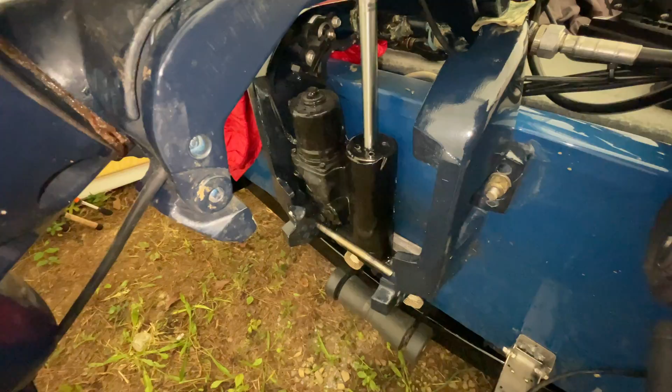All right guys, I've already got this broke loose. I didn't film me breaking it loose because I was kind of worried it wouldn't come loose. That's kind of what I want to talk about real quick: I had FedEx overnight me a part from Marine Tech.

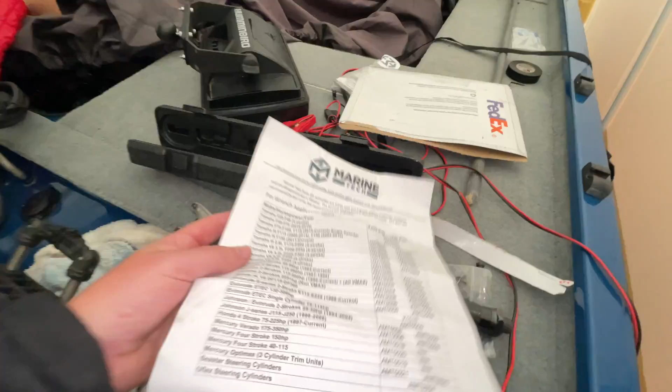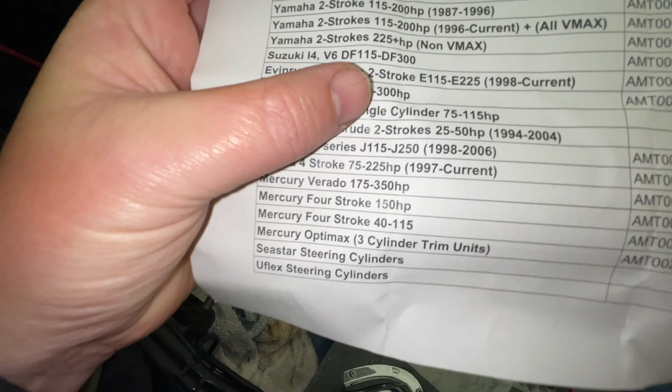They did not, I paid for this part. It cost me close to $80 having it overnighted. But for my particular model here, the Evinrude E-Tech single cylinder 75-115 K1010, is what mine was. So I actually went through Marine Tech, man. These guys are awesome, and got this tool right here, and it saved the day.

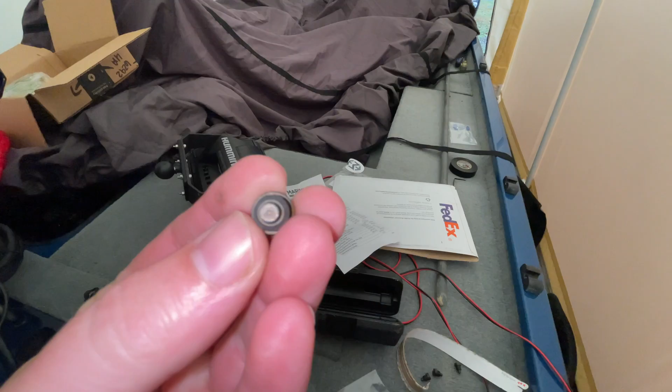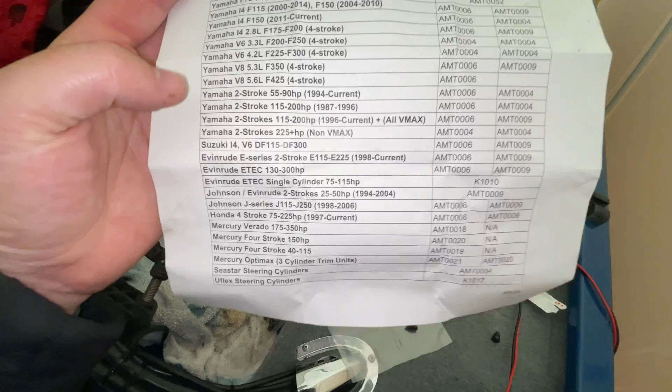What was really great is, I don't know if they normally do this or if you order it from somewhere else, but it came with these tiny little pins wrapped with this in the package. See, I got another one of these I ordered off Amazon from Marine Tech itself, but I didn't really pay enough attention that there's different sizes. I got the 35 millimeter and thought it would fit, but this one's kind of an awkward size. That's why it really doesn't fit anything else other than these E-Techs.

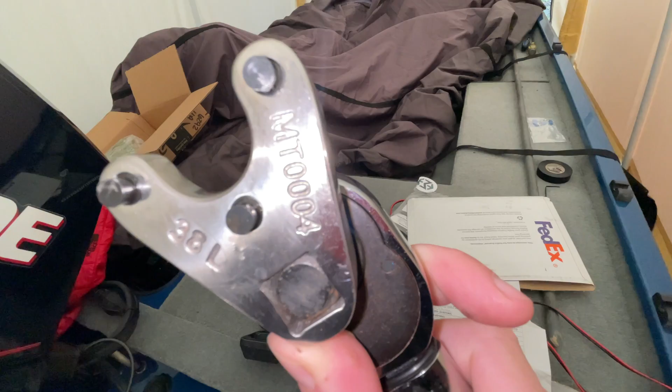This K1010, it's a 38 millimeter. You can see it, 38L MT0004. And that made a world of difference.

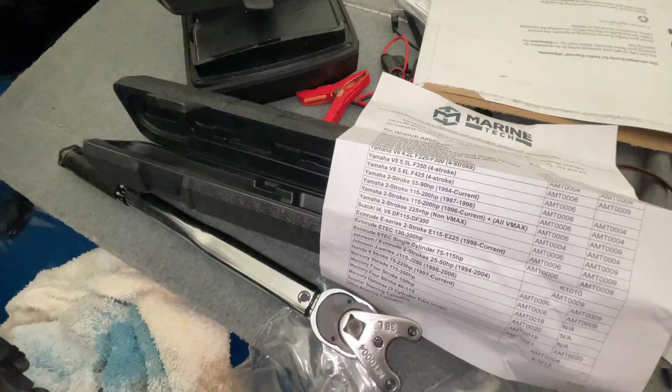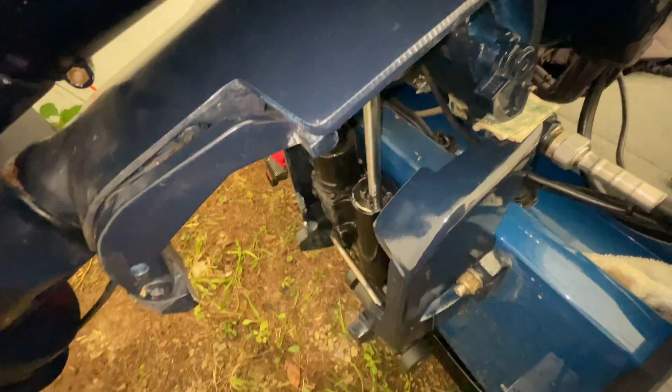Before that, after I ordered that other part and it wasn't right, I got a spanner wrench, which is over there somewhere, and that's how I ended up stripping this, because it wasn't holding properly, and it was just $15, stupid. I thought I was going to end up hitting my shaft there, so I bailed on that real quick and ordered this part here.

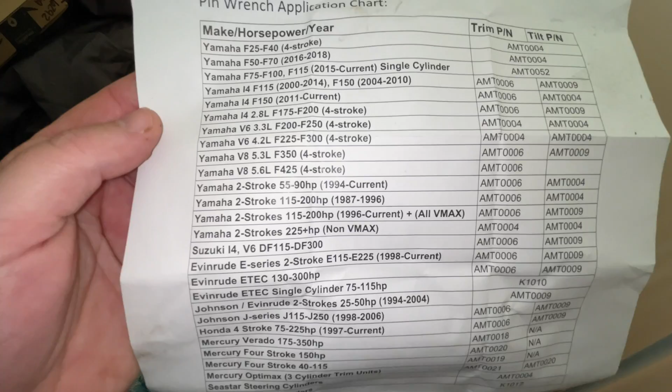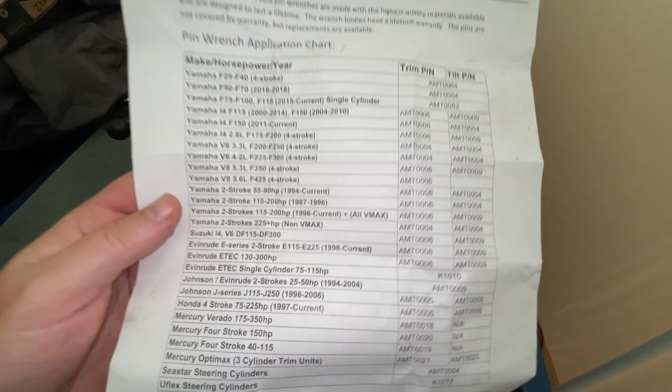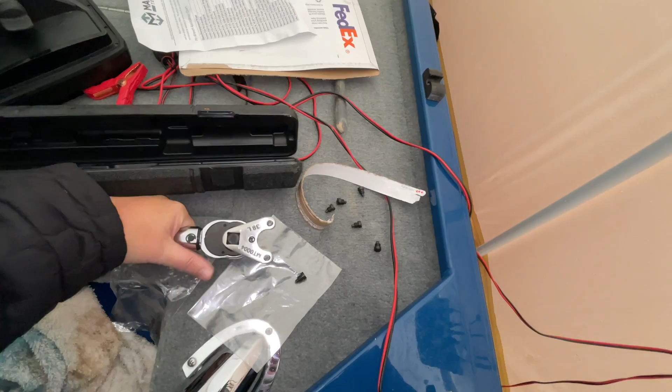Order these things. It's nice because you get 3 points of connection, and there's certain applications with other ones where you can get 4 points of connection. And with this big breaker bar -- well, it's really a torque wrench, but it makes a great breaker bar because it's not a very good torque wrench, but whatever -- it popped it off really well. It did it just like that. I was able to pop it off.

But let's get this off, I got some more stuff I got to do. So let's just get at it, guys. I just wanted to talk about that for a minute because I'm very happy that this actually works, and it worked well. It didn't take me long. I wasn't worried about it stripping or bending. So, all right guys, let's get at it.

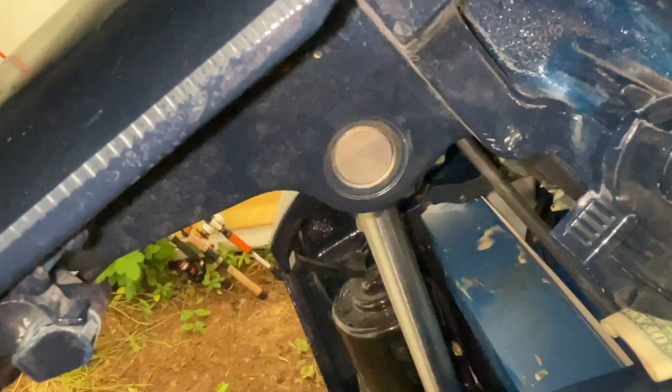All right guys, we flipped over here to... I've done pulled these pins. Once you pull these pins out, use... grab this side. I've got so much stuff laying over here. I had to go at this thing several angles.

I think I put my pin thing inside there. I put the pins in here. It's a little clasp thing just like this. It doesn't take a second to just pull those pins out. And what I'm smacking this thing with, if I can find it, is -- I've done this already to kind of feel my pressure.

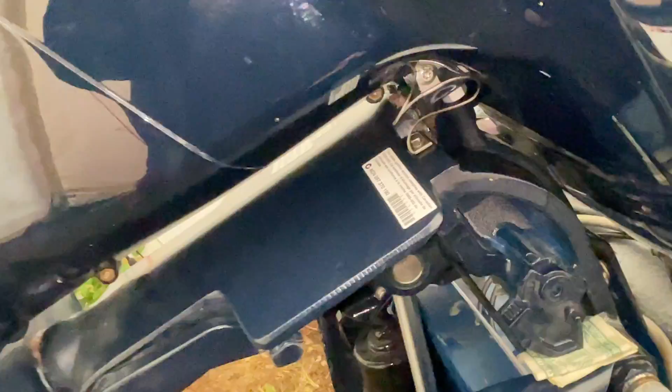All right guys, I flipped over. I've got a brass dowel here and a hammer. I'm going to push this pin on through. Won't take just a second. I'm gonna have to go get my tripod and my other camera, because this isn't ideal.

All right, first pin out. This is loosened up. Can y'all see anything? I can't see this, let's move this around here. These three points of connection here, you're able to just, and with this kind of wrench, makes it really easy. Put this in here, these holes.

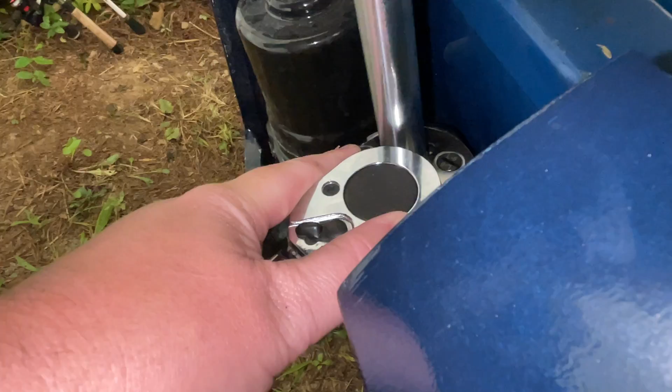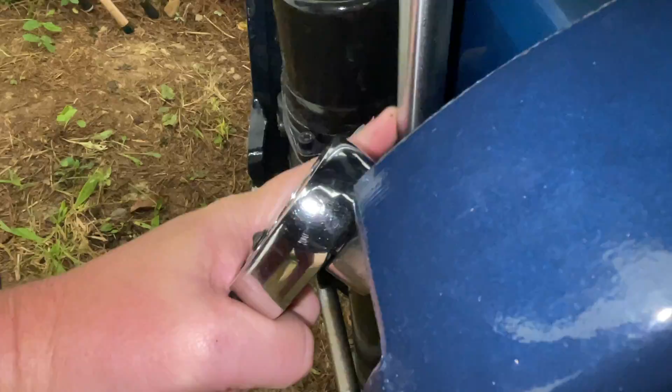And it just connects, and it will spin. See it spinning? Now, I should have wrapped this up, but it came out so easy and didn't pop up. I just put it on there to test it, and I was able to pop it right loose with this bar.

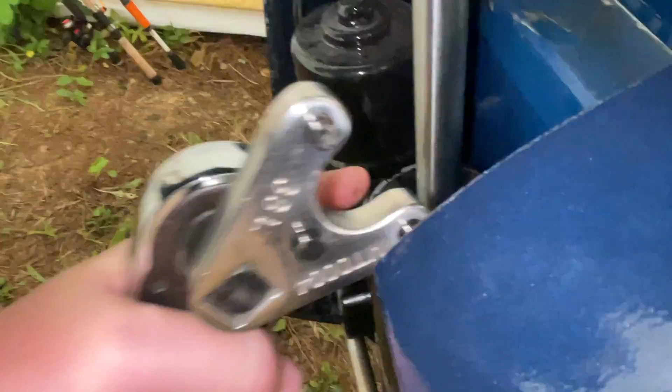All right guys, I'm gonna go ahead and get this head unscrewed. I gotta figure out how I'm gonna get this shaft out of that without touching this, real quick.

All right guys, boy, I look like a wild animal right now, I've been prying on it. Actually, it wasn't that bad, it wasn't that hard. The lighting is horrible in here. Even though this camera doesn't seem like it, I tried to set up my DSLR, and it just, you can't see up in here properly, so it doesn't work well.

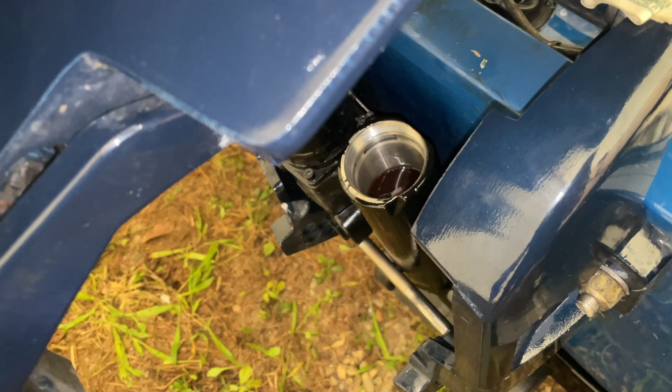So I'm gonna flip the camera around. I'm gonna talk about what we're doing and how I done it, and I'm gonna explain it the best I can to a T. All right, what we've done here, we have the shaft out. I wasn't able to film it, but I'm gonna explain it because I did it really easily, and I was able to leave the lower unit in here as I did it. So how I done this is I completed unscrewing the cap.

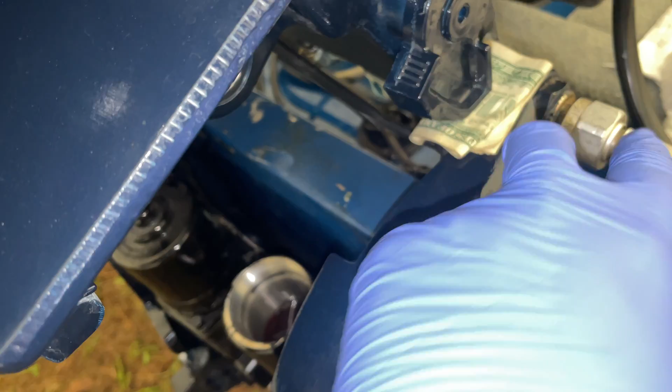Once I got the cap unscrewed to where it would just freely flow, this pin's already out. It's funny, I got a dollar bill, I didn't want to scratch the top of this. So that's my motor keeper. I just lifted on the lower unit here, lifted up, and it wasn't too hard. I mean, it's a few hundred pounds, but lifted it up, and I was just able to slide the shaft completely out of the cylinder.

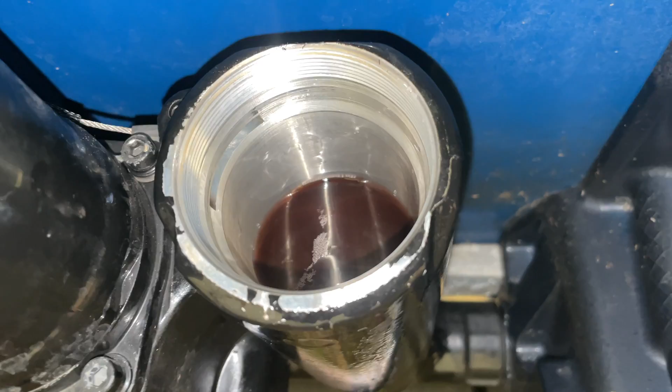There's still oil in there. Now this may be a little bit harder to get back in. We'll see, but that is out, and nothing has to be done down here, so this is fine. I need to get in here and make sure no debris is in my cylinder head. And if it looks like there's some old oil, it might be a good idea to get rid of that. But all right, we were able to get that out.

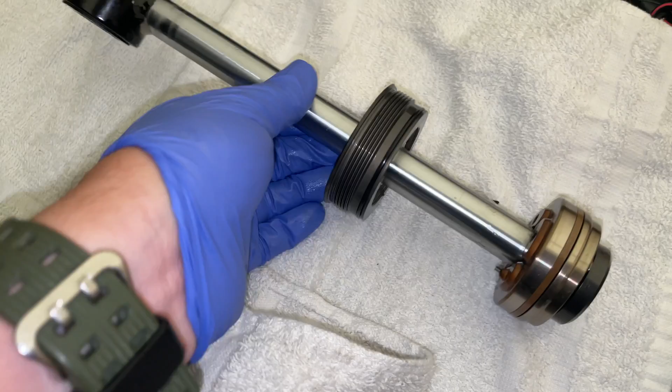All right guys, so we got that out. Here's the shaft, and this is for, a lot of my subscribers are going to watch this video at first, and other people may watch it down the road. If you have one of these Evinrude E-Tech early models, I have the paper in there, I forgot to bring it back out here. When you replace this end cap, it tells you specifically, you spend $170.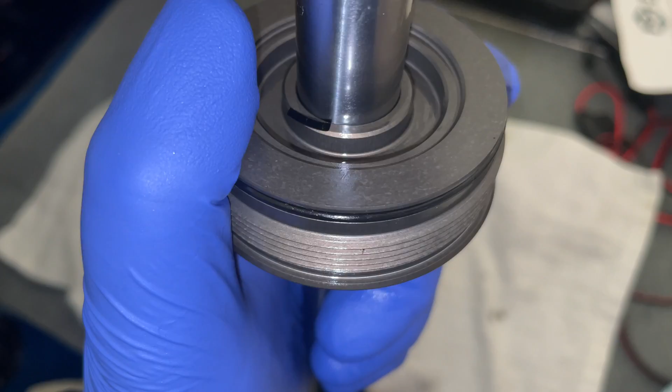You get O-rings and another cap, and it tells you this early model, that cap will not work due to the fact that it has this indention. The reason it has it is because the way the top of this is made, that little piece right there is able to fit in there perfectly. So unfortunately, with this model, in order to keep from damaging anything, you can't use the new end cap, which I'm pretty bummed out about. I have to use this scratched up old end cap, but whatever.

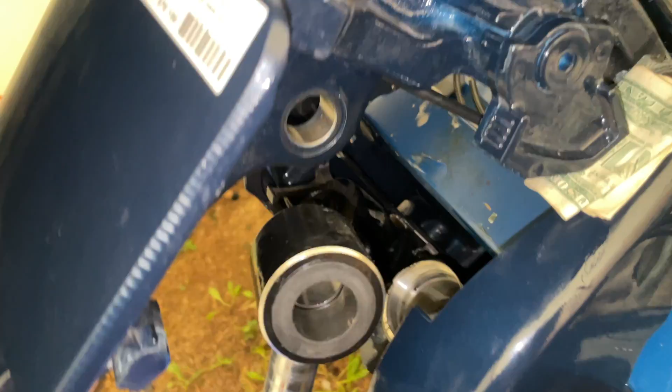So you have to reseal it. But before we can reseal it, we have to get this bottom piece off. Now, I've seen a lot of guys online, they'll take and put this thing in a vise. I'm not going to do that, I'm going to do it a little bit differently. What I'm going to do is put the shaft back in here, and I'm going to get underneath of it with a plate, and I'm going to either just break it loose, then take it back out and unscrew it all the way, or I'm going to do it all the way.

I'm probably just going to break it loose, and then I'm going to take it back out and get these bearings out so I can wash them. And that's what we're going to do next. So I'm going to put the unit back in here, let it hang down.

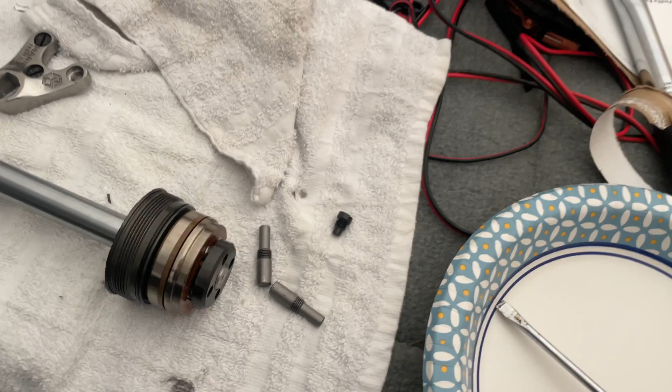All right, guys. Well, before I put it in there, I realized after I cut from that last clip, I don't have to lift the motor up because I can just move it into place because it's free. I don't know what I was thinking. But we ran into a greater problem. This is the one that I ordered that fits from Marine Tech. This takes off the top cap right here.

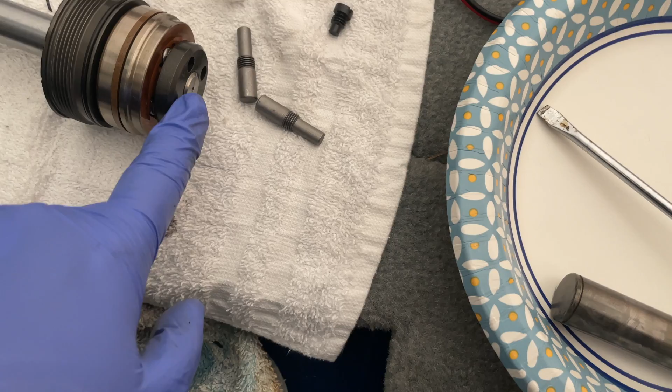Well, I didn't think about this being a different size. I don't know why it didn't cross my mind. But my spanner wrench is too big. The pieces that go in the spanner wrench are too big. So that won't work. So I got to thinking about that one part that I ordered that was too small, because that's how much smaller that one is than the one that I had to get for this. Whatever, it doesn't matter. But what I'm trying to state is God is good.

Because if I take that piece out and these two pieces, it actually fits perfect. I don't know if y'all can see that. I don't know if I can do it right. It fits perfect on there. So I have 2 points of connection on the side.

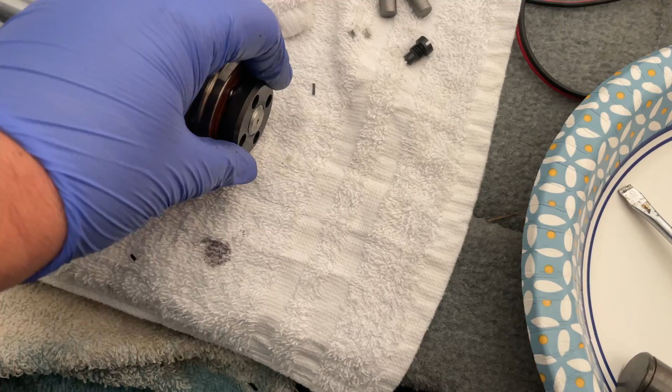So, hey, it's a mistake. It was like $60. I thought that was a big mistake, I would never use it, and there you go. God is good. I got a purpose for it. So it does work. So yay, I don't have to order nothing else and stop what I'm doing. So let's get this thing back in here, on here, get under here, and get to cranking and get this thing popped loose.

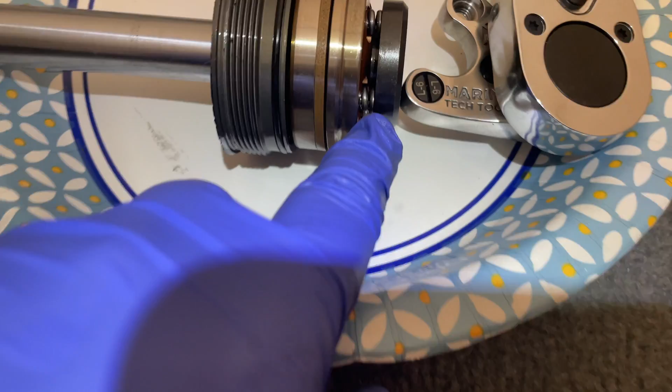All right, guys. So what I did was, I hate that I'm not filming this properly, but I'm still giving y'all the idea of how to do it. I put the pin back in there, held it down, I put the wrench on it, and I broke it loose. And as you can see, the springs and the little ball bearings are starting to come out.

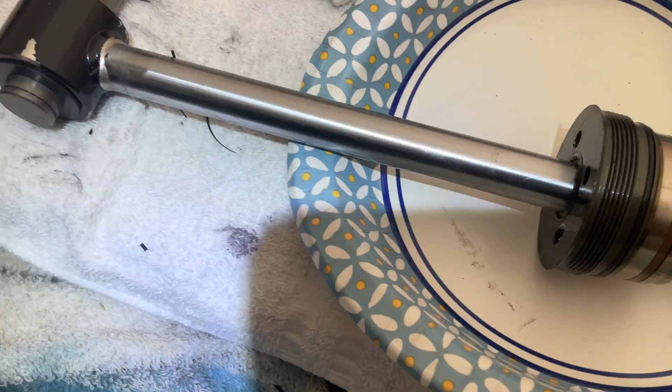And I broke it loose enough that I brought it up here, and I took the pin just to not stick any foreign objects and scratch anything. I stuck the pin in here and I'm holding it with my left hand, and I'm taking this with my rod and I'm turning it until these pop loose. And that's what I'm gonna keep doing, guys, until I get this off.

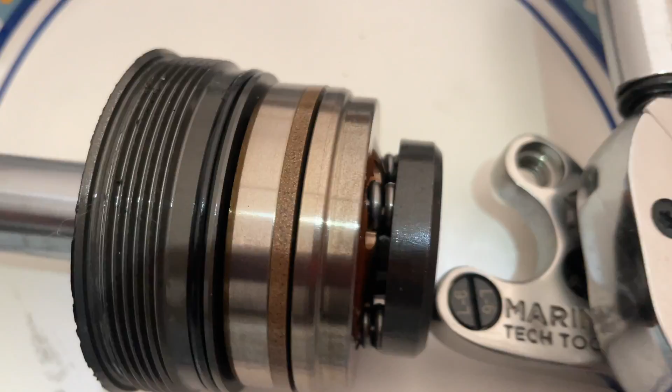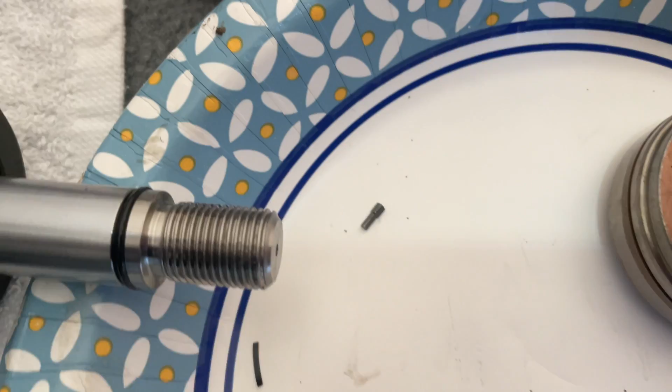Okay, guys, I got this off here. It was kind of a pain. I'm so happy that I messed up and ordered that extra part. If I wouldn't have got that, boy, this would have been rough. But the way I done it is this fits in over this. It goes over the O-ring. You just pop it out. This unscrews off like this, and I was able just to leave these springs in their original spots.

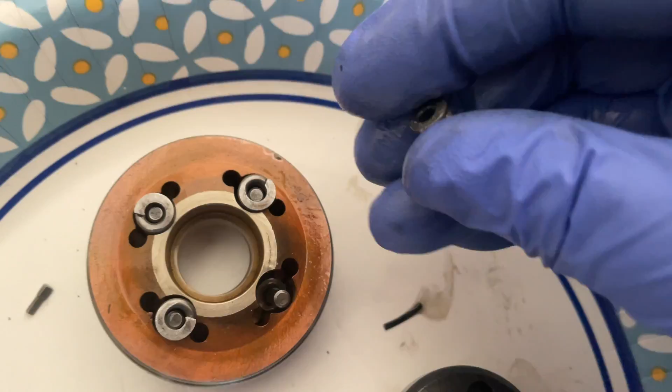I may clean them up and take them out anyway, but as you can see, the ball bearing fits. Well, hold up, guys. There's like a little pin that goes in there, and on the other side of that pin is the bearing. So if you mess up and they pop out, it's ball bearing on the bottom, pin, and then spring.

Then this piece. All right, guys, I'm gonna get this pulled off here, wipe it up, and then we're gonna go in the house and switch these O-rings out. And that's where we're headed next. All right, guys, here's the part, we got it off. But I want to show y'all here.

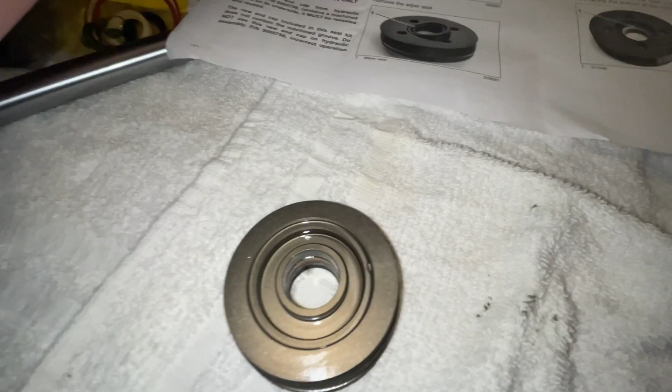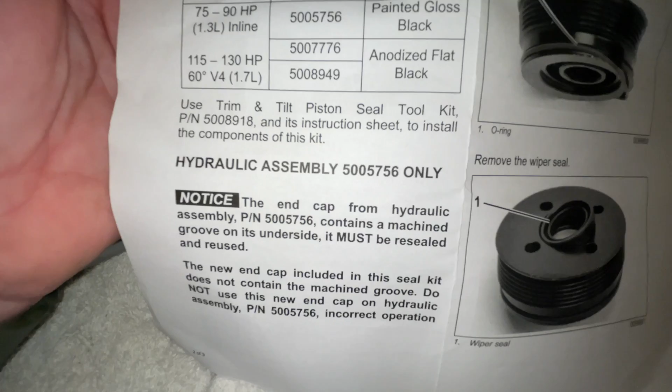It says, notice: the end cap from hydraulic assembly P/N 5005756 contains a machined groove on its underside. It must be resealed and reused. The new end cap included with the seal kit does not contain the machined groove. Do not use the new end cap.

And as you can see here, this is that one, that I'm not supposed to use a different one. I have to reuse this one, which is unfortunate because you can see the groove right there. And this new end cap that they send you, which I would really like to use, is smooth.

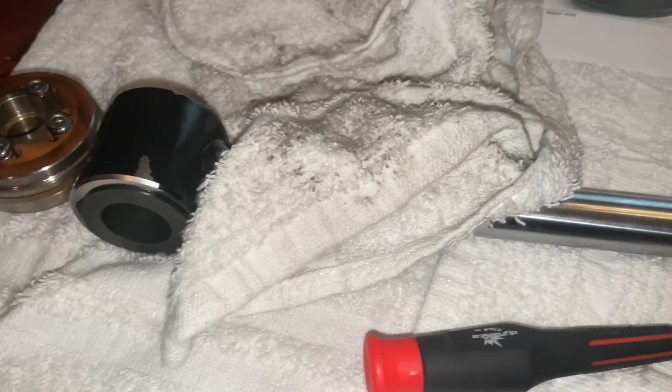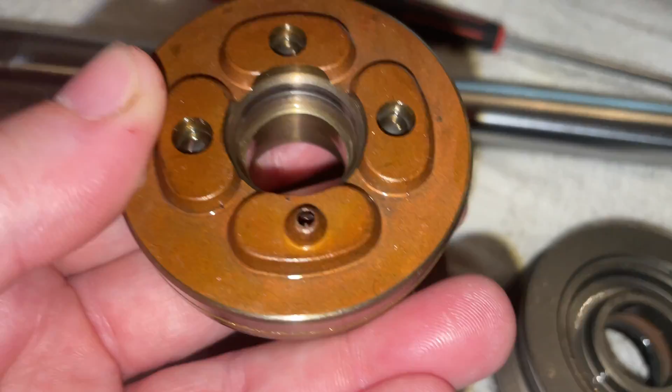All right, guys. Well, after sitting here thinking about this for a little bit, I watched some other videos on YouTube, and it seems to me, because I got this original piece, this part down here is what touches, and there's a pin right there that goes in there. I think this is just like a deterrent to keep other parties from making these end caps. I think that's what it was, because it's extra money to machine these out like this, so they built this little anti-thing.

So I've seen other people change it, and it looked like to me this piece was completely drilled out, like they drilled this down to make this all flush. That's what it looked like to me when I seen it, but I might be wrong. But I got to thinking, wait, I'm going to leave that pin out, because that pin makes it stick up even further.

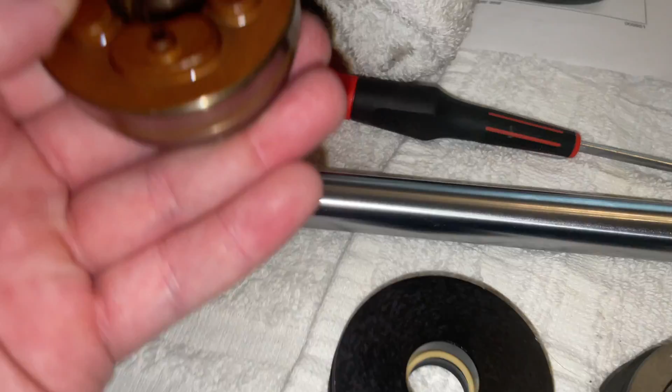When I was lifting the motor up and putting it down, this thing was still down in there a ways. With my motor, I think it would have to be all the way up for this to actually hit the bottom of this cylinder. So, I don't know. I might just use this end cap and go with it and then just throw a Hail Mary and see what happens.

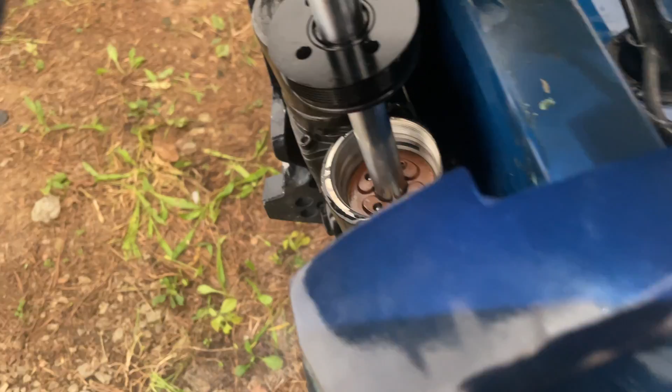All right, guys, I'm back out here. I got the end cap put back on there for the springs, and then I lifted the motor back up, which I'm wore out, and I placed it down in there. And see, this is at its maximum tilt right now, which I never do.

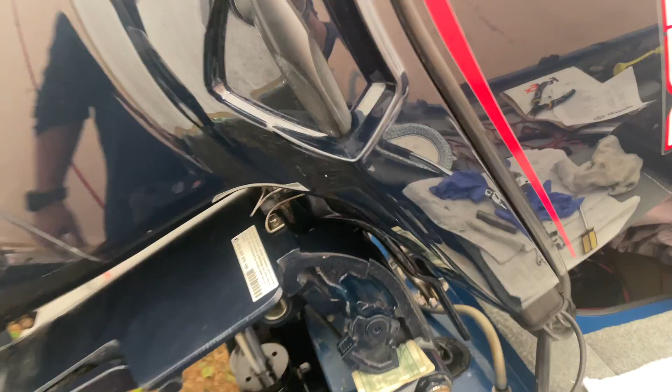So therefore, I know with this cap, which I'm not telling anybody to do this, but from what I looked at, you got to realize these companies got to make profit. They are a company. When they sell you the motor, they want to keep selling you stuff afterwards. So a lot of times companies will put deterrents to keep the aftermarket from making parts for it, or you being able to use other parts on things. And that's a guarantee what that pin was and that little popped up piece.

So therefore, I'm going to tighten it down enough, and then I'm going to take the trim and tilt and drop it a little bit, and then finish tightening it off. And next time, if I ever had to lift this motor this high, I mean, it's almost completely up. I never use this pin thing. I just don't use it.

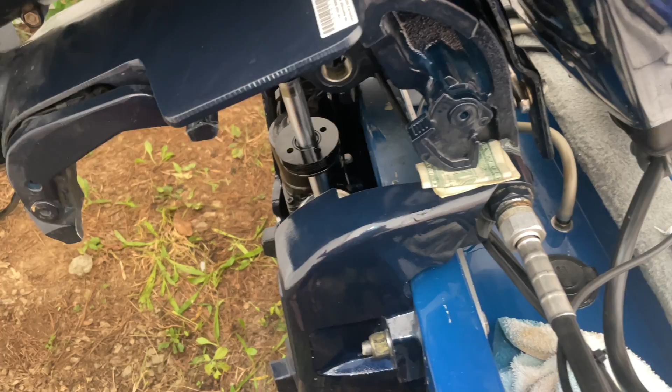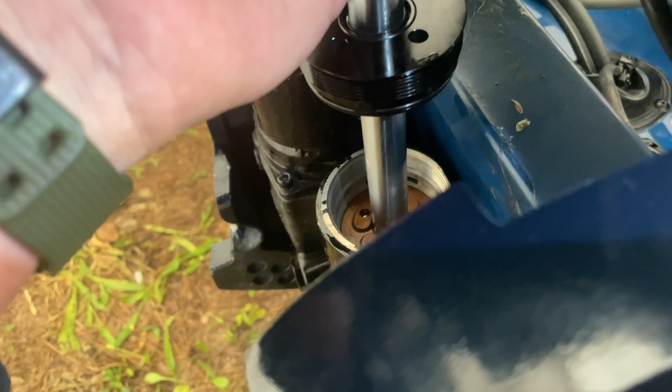So next time if I'm doing this, I already know I need to loosen this, bring it up some, loosen this, and then bring it on up. And that's that. But I think it will be just fine. I actually don't think with the clearance after I put this in, because the motor can lift up even more. Like you can see there, I need to lift the motor up a little bit more, and it will push that down a little bit more when I put that pin in.

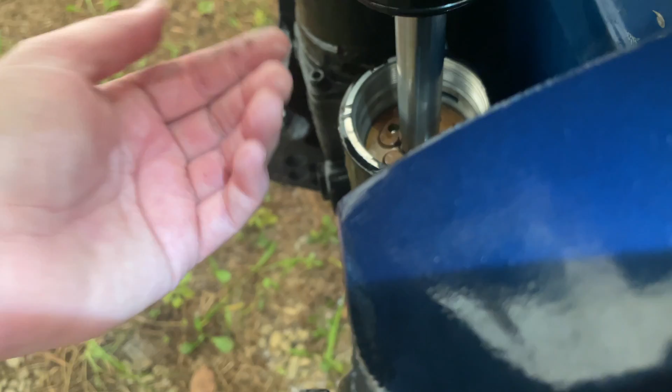But I'm going to tighten this down first. See, I have all that resistance because all that fluid is filled in here. Once I tighten it, I will turn the thing on. The fluid will move over here, and this cylinder will drop. And I think that this end cap will work.